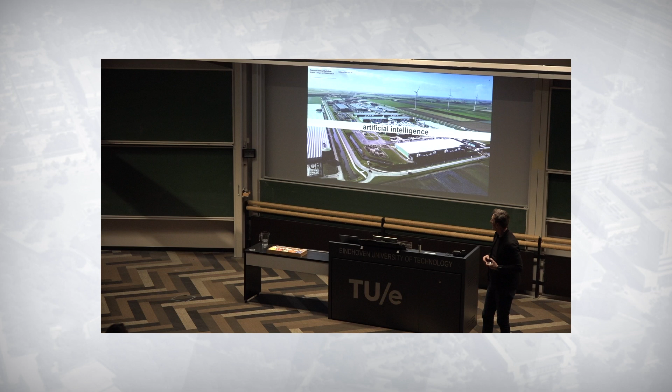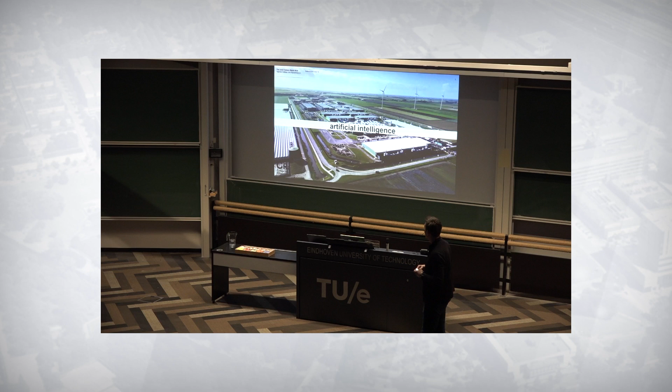So what does it really mean? It means that we are dealing with a different way of how society will be functioning now, but also in the future. And because of all different sorts of activities that will take place, which has a very strong economic component, but also a very strong sociologic component.

We have to deal with, which was already mentioned in the introduction by Juliette, all aspects about a more healthy environment, reducing the numbers of emissions that we produce as humans. But also sustainability as an act.

Are we living in a fair country where for everyone there is the possibility of having a sustainable living environment, or are there still people who do not benefit from any action there? The number of households in the Netherlands which suffer from poorness in energy currently exceeds over 1 million.

But also the change of public space. What we see happening is that the public space starts to become privatized more and more. Companies that use these streets use the public environment as part of their business case and do not provide any proper contribution to society. But also the disbalance between how the government functions against its citizens.

This is a picture of one of the houses in the north of the Netherlands, Groningen. It's an area where in the past 60 years we used this area as a source of energy, taking the gas about 3,000 meters below the surface, and where huge damages to real estate has happened over the last 20, 30 years, and where the government is not in a position to properly find proper solutions for people to help them and to create, again, safety in their environment.

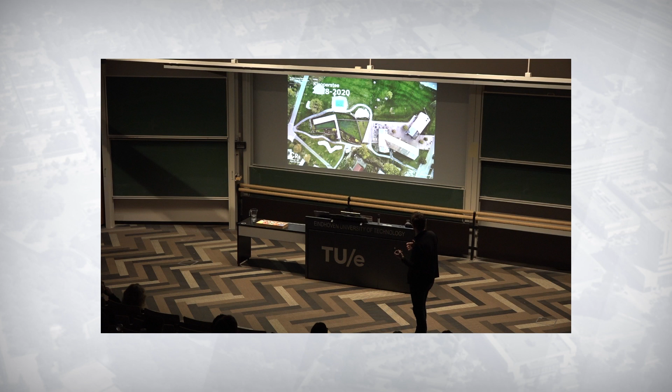Smaller projects—this is one we recently did in the Netherlands at Vakwerkarchitecten, a collaboration with landscape architect Inside Outside. It's a holiday park, completely different from the work I was doing at Mecanoo, but more closely connected to the entrepreneur and owner of this village, in close collaboration with other consultants.

But also bigger projects—this one is ongoing, started in 2022, again a collaboration with ZUS from Rotterdam, where we mutually work on architecture, urban design, landscape architecture, and all the sustainability aspects required in the city of the future.

From 2017 we assembled this team, and the team has changed again. We're a total of 30 people working from our office in Delft, which is also a Rijksmonument—a national heritage building we bought and developed, translating it into a co-working environment. So besides being an architect, we are real estate developers, hosting 200 people across 80 different companies working in this building, including our own cafe. So I'm apparently the first bar-owner Rijksbouwmeester in the Netherlands.

As Rijksbouwmeester, I'm number 39. What's interesting about this picture is that the Rijksbouwmeesterschap started when Napoleon was still the conqueror here in the Netherlands, and he decided to have a state architect or royal architect working on behalf of the king—working on palaces, and later on palaces of justice, prisons, etc.

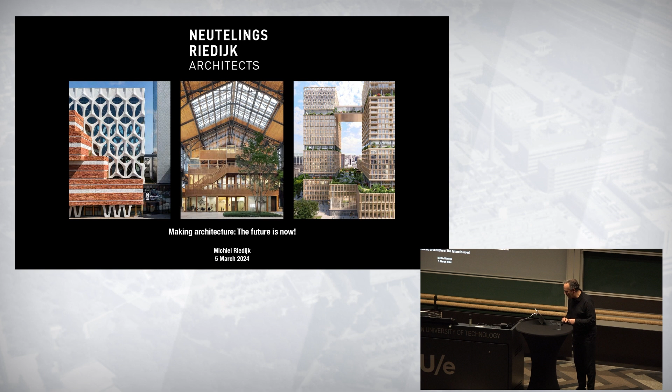I have the advantage and the disadvantage to be the second after the wonderful lecture done by Francesco. So I was wondering while listening to Francesco whether to change all my slides. And I won't do so, but I will try to get into dialogue with Francesco and of course with Juliette's brief introduction. First and foremost, I would like to discuss the possibilities and impossibilities of architecture.

As you all might know, architecture as a profession, but also the outcome of the architectural act, the outcome of a design, is highly disputed. One of the first world exhibitions was hosted by Paris, and Gustave Eiffel, the famous engineer, had the idea to make this grandiose gesture, a kind of ridiculous tower that would scratch the Parisian sky, and everybody hated it. They were revolted. Famous Parisian authors like Émile Zola and Guy de Maupassant were fiercely opposing the idea of this ridiculous tower without any purpose, without any taste, without any expression, conceived in steel.

However, now, more than a century later, everybody considers the Eiffel Tower as the embodiment of what Paris is all about: the city of light, the city of progress, the city of love, and eventually, of course, the Eiffel Tower is a pivotal element in that.

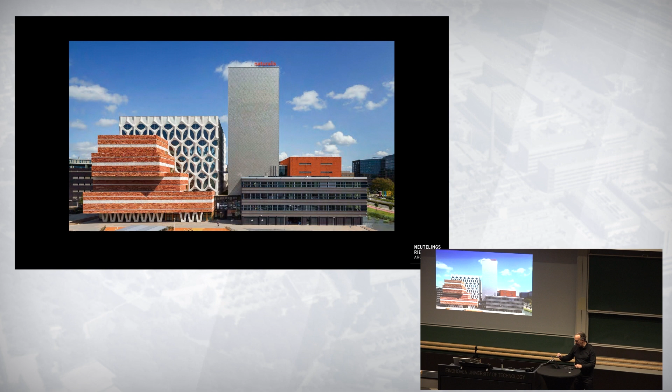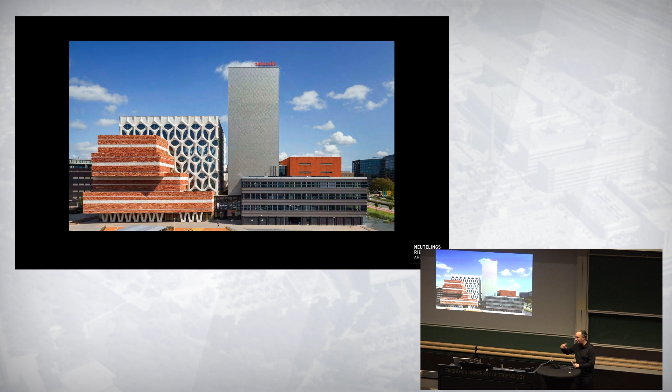One of the key elements in winning this competition and in understanding this assignment is completely repurposing the existing building. The existing building was a natural history museum, the natural history museum of our country, connected with a collection tower. Since Naturalis obtained all kinds of new collections, all university collections are also accommodated in the building. The collection grew to 42 million pieces, from skeletons of dinosaurs up to bacteria, whatever you can collect in the world of biospheres and biodiversity.

So what we did was repurpose the existing building, changing it into a very large collective, or a very large depot building. All former exhibition halls were changed into depot spaces. We made a new building for the exhibitions, and we repurposed the existing library and other ancillary spaces into offices.

The reason why we did so was twofold. First, since they had this incredible collection, it was very expensive, really incredibly expensive, to move it, so the collection had to stay in place. So the smartest thing to do was to use the position of the collection, which is in this tower, and just have the new collection in the old building adjacent to it, which resulted in all other functions being accommodated in the building next to it.

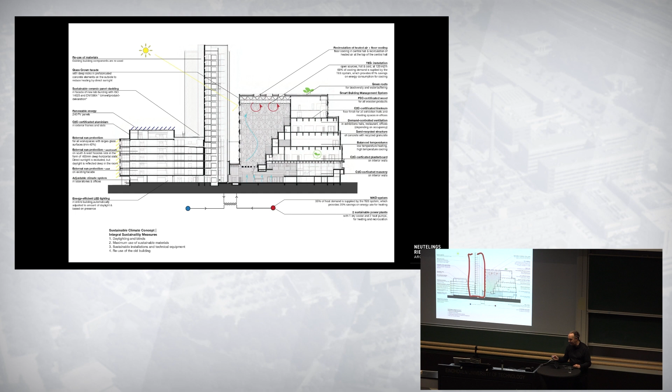Next to that, another reason we followed this strategy is that we could liberate part of the site. By liberating part of the site, the idea was that Naturalis, which will be executed this coming summer, provides a very large urban park, a biodiversity park, where you can literally encounter the species and plants that were living in the age of the dinosaurs, for instance.

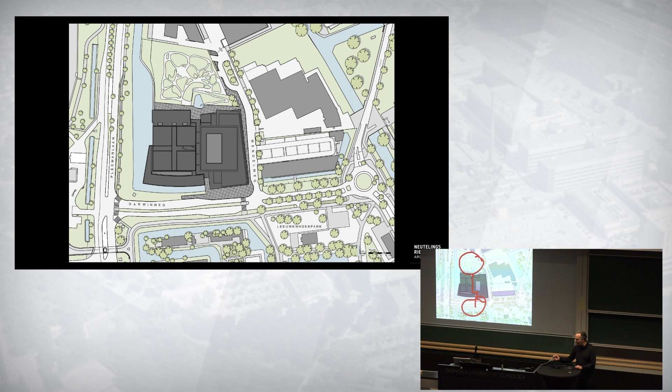Next to that, getting back to the notion of collectivity, the idea was that through a passage, the building could be crossed by everybody. The building is always open for everybody. You can cross the building, and then as soon as you start on the staircase, you are ticketed.

In order to establish this very ambitious agenda related to the collective moment, providing a space for everybody, young and old, highly educated, uneducated, from all kinds of backgrounds, the idea is that Naturalis, as an institute, receives everybody and immerses everybody into the beauty of the biosphere that surrounds us. This passage is always open, and when you're in this space, you are always in direct connection with all aspects of the beauty that surrounds us.

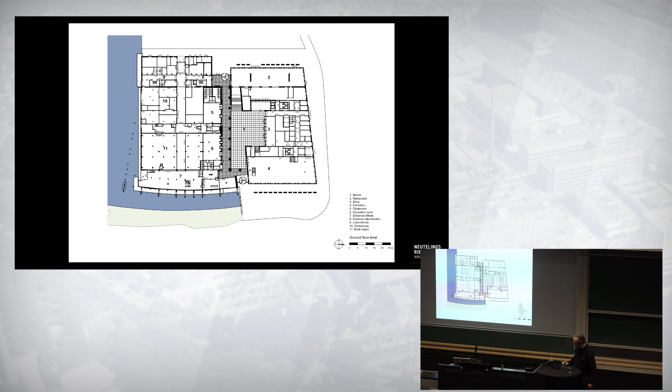Here you see the existing building, and later I will show you how we repurposed that. By having these former museum rooms opened up on a central corridor, you have very large depots all of a sudden that, since they have this kind of collective spine, are also highly secured and relate to the highest quality of air handling system and demands.

On the other side, we established a system of large exhibition halls with emergency staircases in between, MEP services in between, and a meandering route that goes up with staircases, allowing you to enter all the different exhibition halls. The section is also super simple: you have these central spines with all MEP services in it, and a wall here and a wall there. All the large exhibition halls span 21 meters across, and the large walls are gigantic trusses, which helps make these very large halls where the dinosaurs can be on display.

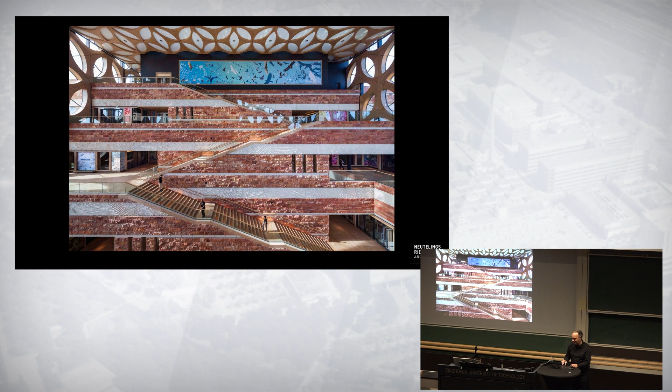There it is, there's the dinosaur, what a surprise. And then in all the other spaces we have laboratories where they study viruses and bacteria, or maintain all kinds of animals from the last ice age, or collect all different kinds of small animals, comparing their development and looking at the small differences between elements and species in order to understand what happened and why they're influenced by climate or other things that make them change.

The idea about this space is to create an analogy with the beauty of the nature that surrounds us. You can discover leaves, a mountain, all kinds of aspects that relate to the beauty of nature. But simultaneously we hope the architectural power of this space creates a moment of collectivity and togetherness, which is one of the key aspects of architecture, but also of sustainability. One of the questions facing contemporary society, besides energy transition and the lack of biodiversity, climate change, is loneliness. So how are you able to establish a space so beautiful that you would like to engage with the other, the unknown other you might have feared in advance? We hope and think architecture might be able to contribute to that.

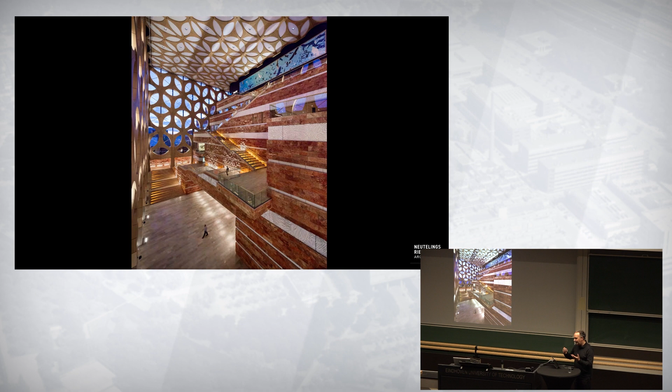The art, which we also discussed, the art by Tord Boontje, but also by Iris van Herpen, is a means for us to identify with the space, but also to establish a kind of haptic relation. You would like to touch the stone, you would like to touch the fabrics cast in concrete by Iris, in order to physically, bodily relate to what the building is all about.

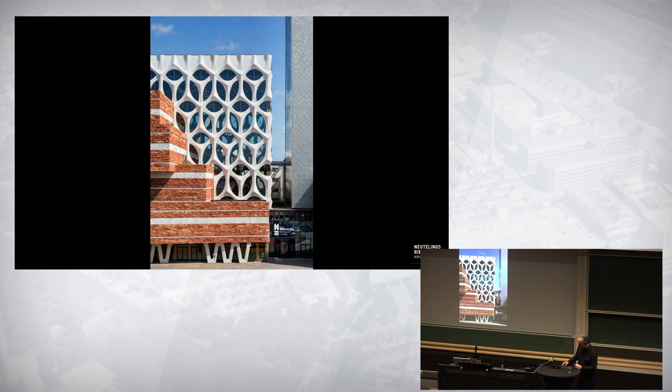So for us in Naturalis, to summarize what the design is all about, the design is about radically repurposing the building. We have a building formerly used as a museum building, and we change it into a depot building. The former museum halls become depot spaces, and by reconceptualizing it that way, we achieve three things. We achieve a very low carbon footprint because we completely recycle a building that was otherwise going to be demolished. We obtain a very secured and very high-end depot space, since all the depot spaces are together. And we can establish a museum building as a third aspect, which really contributes to the beauty of the collection, because you can make a very high exhibition hall for the dinosaurs, or a lower hall for other species, where all the halls are really catered to the needs of the exhibition.

I will now tell you about Gare Maritime. This is the first of two designs I will show tonight, both located in Brussels. Gare Maritime is already finished; the completion was in the second COVID year, I think 2020. It was a repurposing of a former station.

In 1992, this system stopped because, due to the Treaty of Maastricht, all European inner borders disappeared, as you might know. Because of that, this whole freight station became derelict. Before that, trains coming into Brussels would drive down and enter into all these sheds, loading and unloading their cargo, and there was a shunting yard here for trains as well.

So after 1992, the building was derelict. Here's the harbor I was talking about, where all these ships came to the sea. And you have to know that on this side, there's a neighborhood called Sint-Jans-Molenbeek, which is a very reputed neighborhood.

On this side, there's the inner city of Brussels. So we had to reconceive this building in such a way that it would cater three needs: it would cater new functions, it should cater the needs of the neighborhood directly adjacent to the site, and it would also cater the need of maintaining this monument.

So what we did, we established a system with 10 different pavilions, as we call them, full timber pavilions. These timber pavilions are 5 times lighter than a comparable structure in concrete. Due to that, we could build these new structures under the historic roofs of these 7 sheds, while maintaining 3 of the central sheds open without any function, besides the green, which is now red, catering a giant covered public square for Sint-Jans-Molenbeek, where all people are welcomed and received.

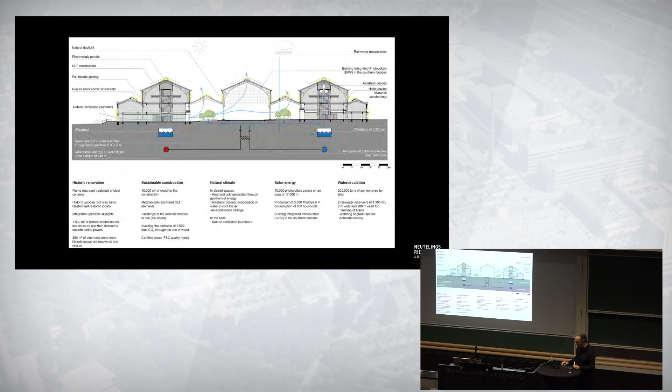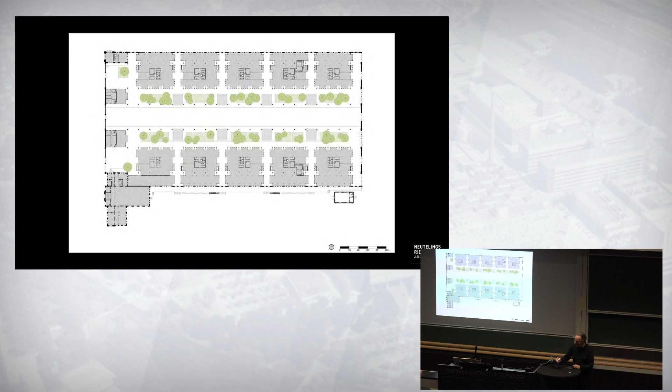So primarily you see that again: these are the middle bays, the 3 middle bays that remain open, and in the 2 side bays on either side we established these pavilions. These pavilions open up across footpaths and roads that relate to the neighborhood, and these gates open up to Sint-Jans-Molenbeek.

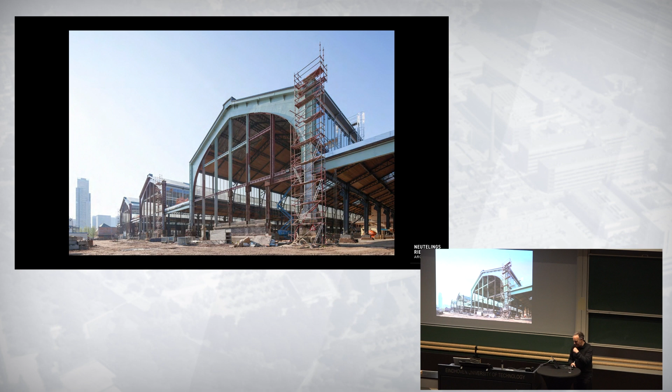In 1992, the building was completely derelict. It was abandoned, in a very poor condition. By establishing these timber pavilions, we were able to maintain the very refined cast iron structure, and simultaneously repurpose the full building and establish this very generous public space, which is a contribution to the living quality of both this part of Brussels and Sint-Jans-Molenbeek in particular.

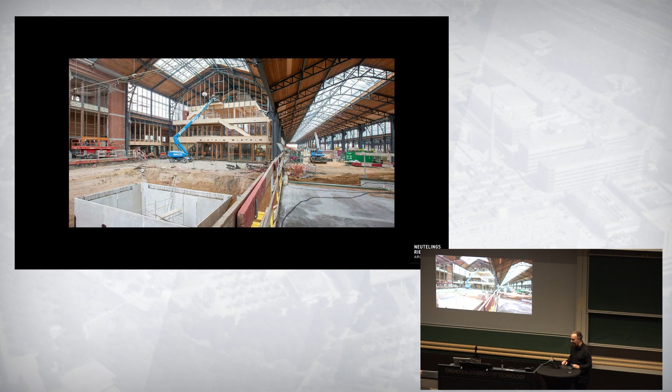And as you can see, due to the fact that it's this lightweight timber structure, all parts work as a kind of kit of parts. The buildings were trucked into the space and then hoisted on site and mounted on site. This also established a very high building speed, execution speed—it was a very fast execution process.

Simultaneously, of course, we renovated and restored the former splendor of the 7 halls. Next to that, there are also a few buildings that were part of the functional properties of this freight station. I won't go into that, but primarily we turned it into this large city of 300 by 150 meters wide, where it never rains.

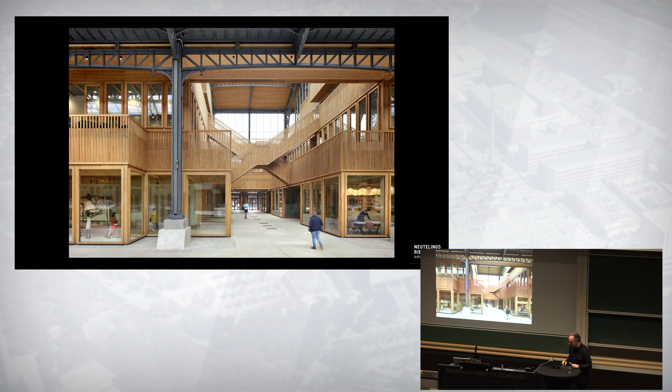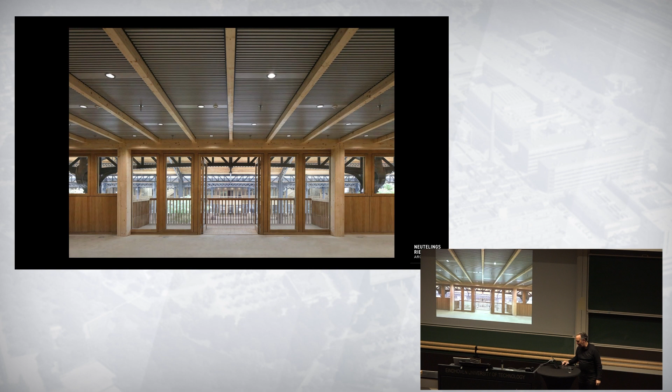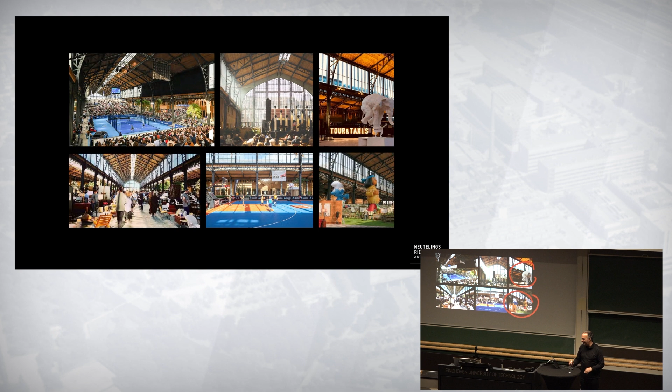And of course, the small side bays open up to the neighborhood. Under the former roofs, you have these beautiful timber attics where all kinds of fancy people are working right now. But what's more important, the building caters for small basketball tournaments, sports events, bourses, art fairs, comic book fairs—whatever you need in Brussels as a contemporary citizen.

So the first building was about biodiversity and creating an expression related to biodiversity. In fact, Gare Maritime wasn't necessarily about creating an expression, but about creating space for everybody. Regardless of who you are or your background, you are always able to enter Gare Maritime, and the new blocks—50,000 square meters of timber structure, the largest timber building in Europe at the moment—provide functions for leisure, retail, and offices.

But primarily, for us, the main purpose of the design was by shifting all new program to the side bays, we were able to establish this large covered square which relates the neighborhood to the future park in the middle of the site.

The Proximus Towers are also a very typical Brussels project—typical because it's part of the same kind of euphoric hubris that was part of the Belgian culture, or part of the Brussels culture. This building is in fact establishing 3 different purposes: it's an office building, it's a very large housing project, and it also offers public facilities, équipement public.

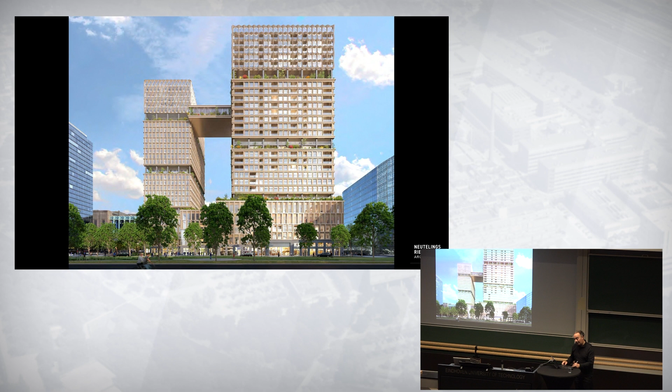The Proximus towers developed from 2 existing towers that are already on site, and we will completely redo them. But first, before we get there, I have to tell you a little bit about the history of this part of Brussels.

And of course, on a certain moment, new developments came into being, based upon this idea. In the vanity of the Brussels politicians, in the late 50s, early 60s, middle 60s, they reconceived Brussels as this crossing point of 2 European highways. One starting from Oslo going to Madrid, and another going from London to Moscow, and coincidentally these 2 highways would cross in the heart of Brussels, in this former working class neighborhood, which were not the voters of these Brussels politicians.

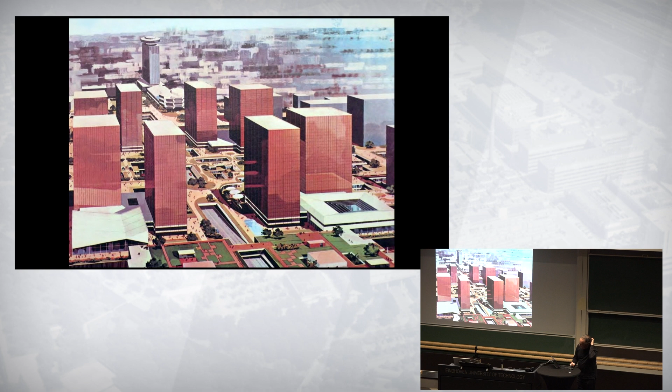Luckily, but also unfortunately for the neighborhood, this never worked out. But they already had destroyed, let's say, 90% of the neighborhood. And then they started to execute part of this scheme, including horrendous buildings on top of the North Station, comprising bus stations, parking garages, whatever you can imagine. And this became the headquarters of Belgacom, the Belgium telephone company, which turned into Proximus.

However, during the COVID pandemic, they discovered that they didn't need it anymore. They discovered that they only needed 30%. So they have this building, and it's 120,000 square meters gross, a giant building. But they discovered that all these workers would work at home and never come back to the premises, their headquarters next to Brussels North Station.

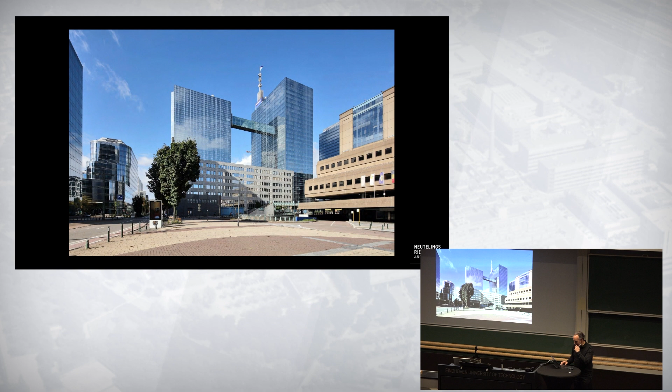So they had a competition where we were asked, and we won this competition eventually, where we were asked to re-establish a new vision for this area and also re-establish a kind of new urban future for this particular part of Brussels.

And the urban future started with establishing full soil. So, as you might know, in terms of urban heat stress, one of the primary elements to fight it is to have full soil, not just a little bit of ground catering your plants at home, but full soil that conceptually extends until Australia.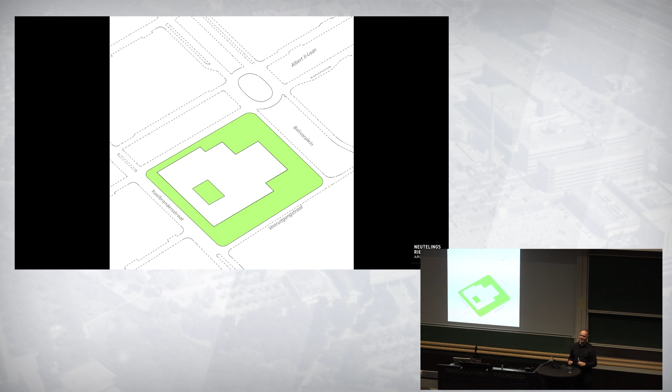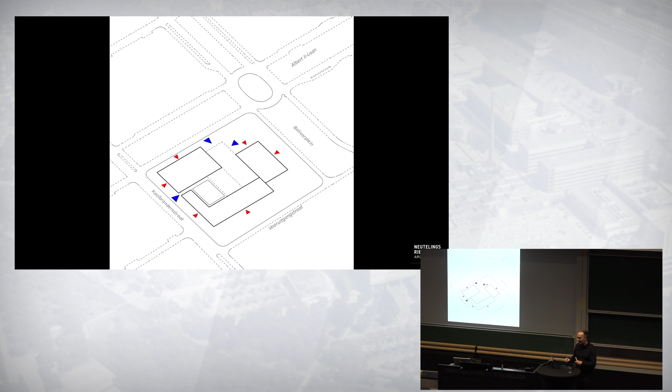What we did is first reconceptualize the perimeter of the site, establishing full soil, and next to that, establishing a full perimeter which is actively programmed, where you have entrances, where you have people living there, where you have eyes on the streets. Instead of having a space which is very unsafe socially, all of a sudden, due to new activities, it becomes very attractive and becomes part of the urban fabric.

Furthermore, we create inner gardens because these inner gardens were not there yet, and these inner gardens, of course, create quality and give quality to the offices.

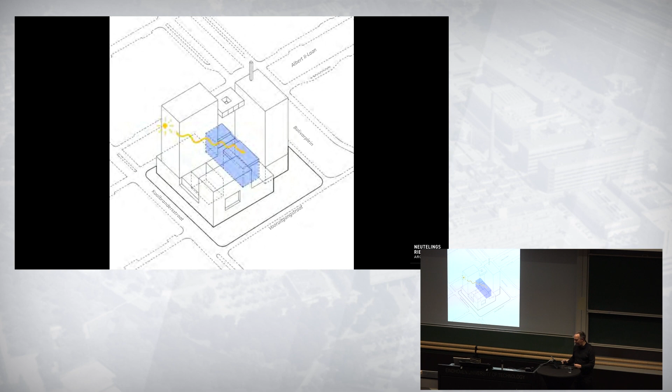We created a central functional spine, and then we organized a tripartite building: this is housing, this is offices for Proximus, this is offices for others, this is the équipement public, and in between there's retail, restaurants, and all kinds of ancillary facilities that turn this into a living quarter of the city. What is also key is that instead of having their own restaurant, Proximus decided they wouldn't have a restaurant anymore, but would allow other restaurants to be established in the plinth.

And so all the workers of Proximus in Belgium and in France, like in a lot of European countries, except the Netherlands, of course, go out for lunch, but not eating a sandwich and having a glass of karnemelk, but having a real proper lunch at a restaurant for a reduced price, and then return and work in the afternoon after having a few wines.

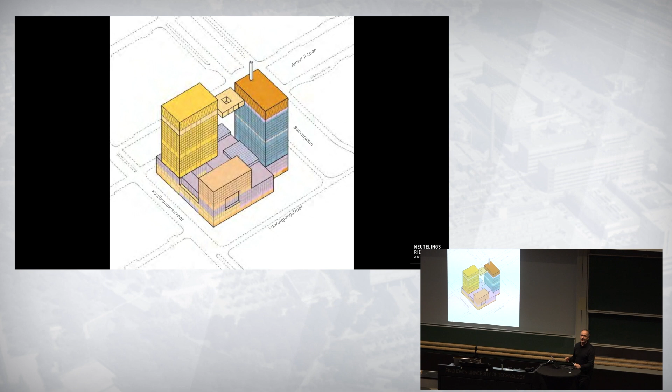So instead of having their own restaurant, they decided to have all the functions like restaurants and conference facilities as public amenities, so that they also activate the street life and activate the surrounding life.

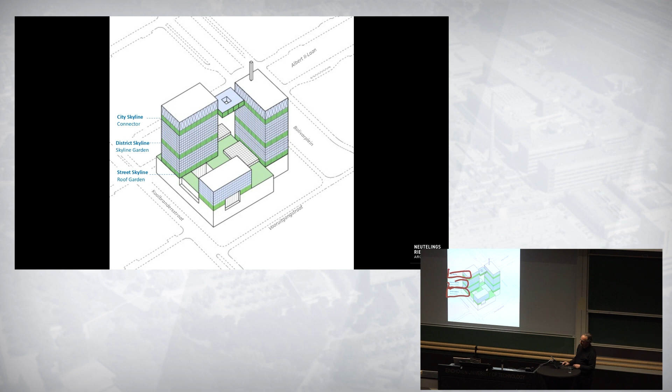And in order to complete the explanation of the design, we established all kinds of green horizons that connect to a certain height and biosphere of the elements that surround us. And the green, of course, reoccurs here.

And then we developed a narrative based on the famous diagram by Alexander von Humboldt, showing that you have different species on top of a mountain, and different species in the valley. He made a beautiful diagram about that in the early 19th century.

And since there's such a lot of wind on top of a tower like this, we developed a narrative, and with our landscape architect, a series of gardens and green shoulders that relate to the famous diagram of Alexander von Humboldt, so that you have the proper biosphere related to the climate of this tower around you.

And next to that, the whole building breathes and has a sustainable performance like the Gare Maritime and like Naturalis. I didn't want to dwell on that, because I think the programming of the public domain, and the possibility a building offers for the urban collective, for the benefit of the greater good, the neighborhood or the city in general, is one of the most important sustainable aspects you can work with.

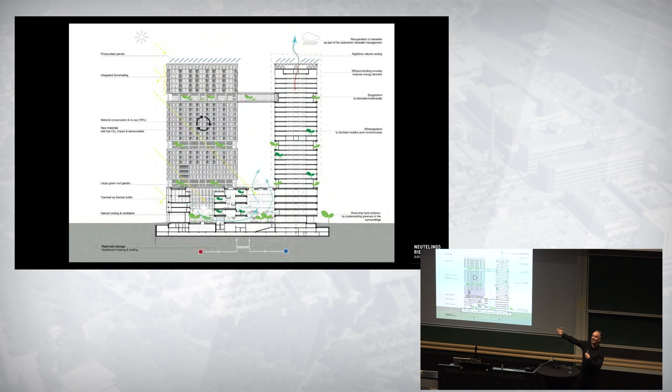Because if you take into account how these buildings were established and conceived in the 60s, with the highway crossing coming from Oslo to Madrid and from Moscow to London, and understand that it took more than 40 years, almost 50 years, to mitigate the scars inflicted on the city fabric in the 60s, we should establish a programming and a city which enables us to accommodate the needs of coming generations and of the 50 years in front of us.

And then there's a very large new garden on the roof of the plinth, where both the offices, the équipement public, and the housing can join this collective moment, together on this new horizon in the city, enjoying the beauty of the Brussels North cityscape, and looking at the beautiful tower done by Victor Horta in the Brussels skyline.

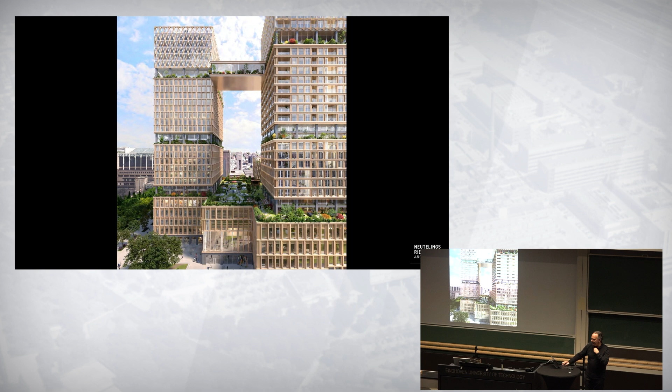So, before wrapping up, as this famous quote by Paul Crutzen says, we entered into a complete new era. We entered the era of the Anthropocene, where all our acts in relation to the built environment directly influence the world that surrounds us.

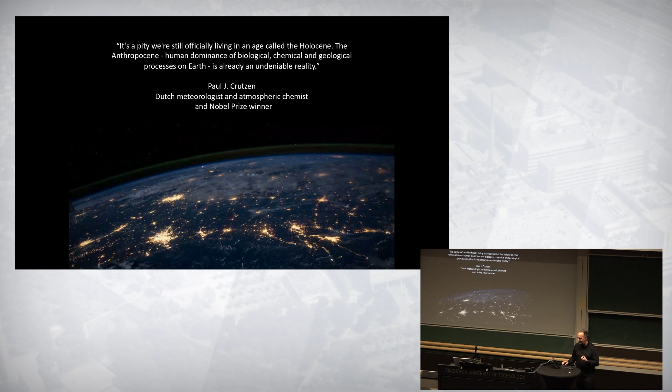And I think it's key that while designing, we should develop an answer to this question, and establish a new way to deal with this. What is our responsibility in relation to the Anthropocene, and how can we develop a new narrative which deals with the challenges that are ahead of us?

I think, before opening up the discussion, there are at least 3 different levels to be addressed. There's the cultural level, a level that addresses us as a collective, that should establish a language and an architecture everybody can relate to, that everybody enjoys, that everybody considers beautiful, spaces where everybody is welcomed, and lastly, that we also use the means of our profession to make buildings that perform in a better way than they have performed so far.